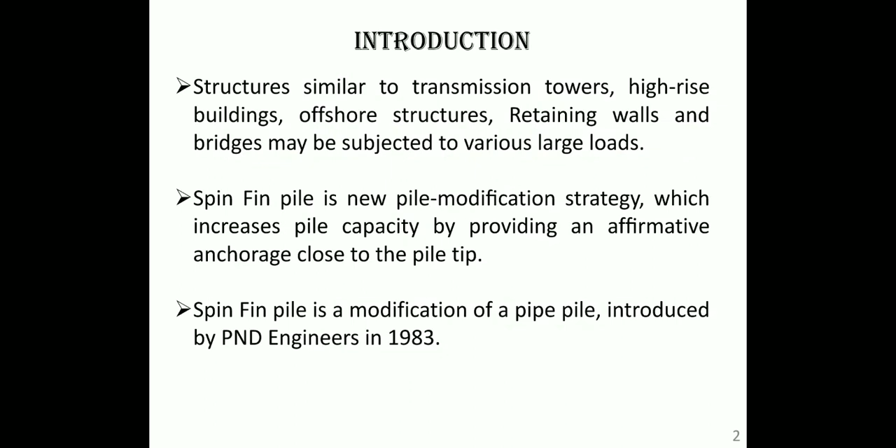Introduction. Many transmission towers, high rise buildings, offshore structures, retaining walls, and bridges may be subjected to various large loads. Spin fin pile is a new modification strategy which increases the pile capacity by providing an affirmative anchorage close to the pile tip. Spin fin pile is a modification of pipe pile introduced by the PND Engineers in 1983.

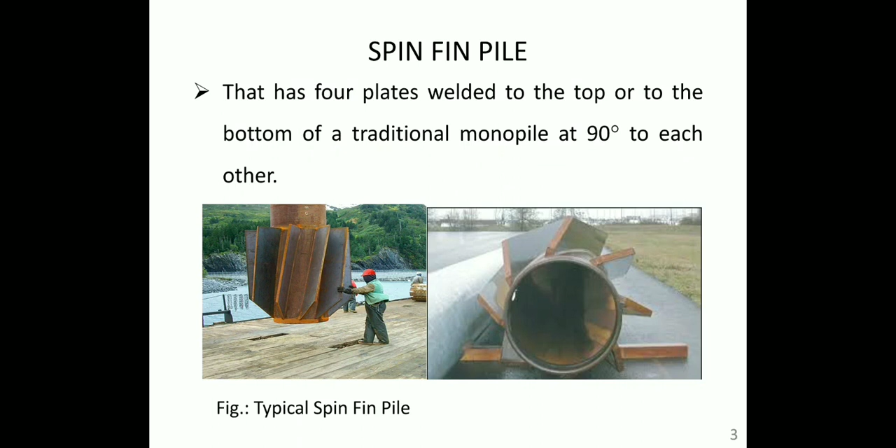Here we can see the typical view of spin fin pile. Spin fin pile has 4 plates welded to the top or to the bottom of the traditional monopile at 90 degrees to each other.

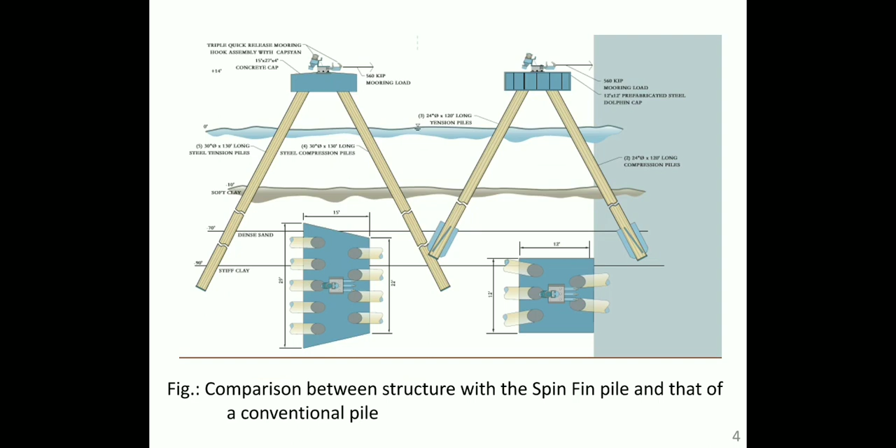Here is the comparison between the structure with the spin fin pile and without spin fin pile. Here we can observe that the number of piles is reduced by provision of the spin fin pile.

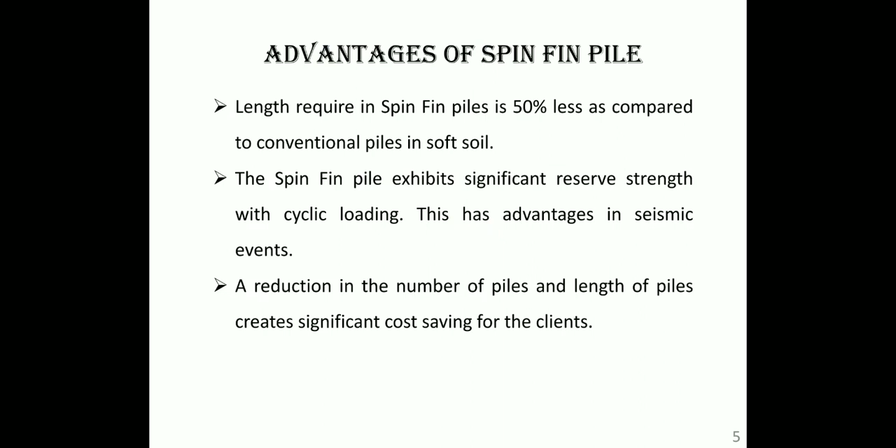Advantages: Length required in a spin fin pile is 50% less. The spin fin pile exhibits a significant reserve strength with cyclic loading. The reduction in the number of piles and the length of piles creates a significant cost saving alternative.

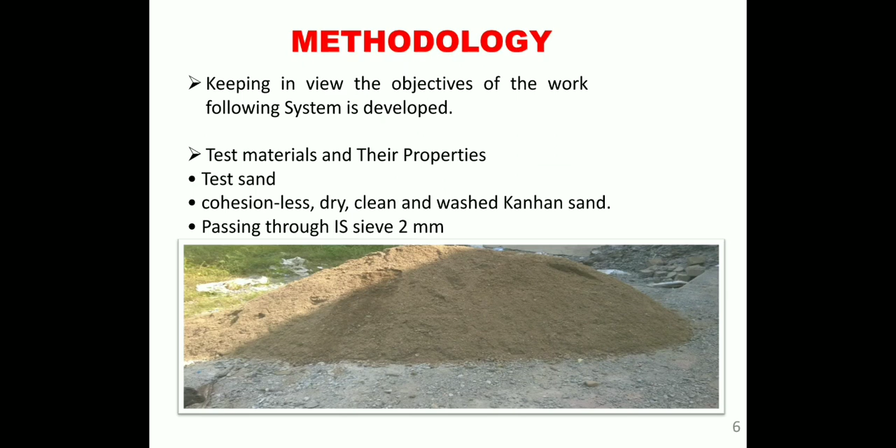Methodology. Keeping in view the objective of the work, the following system is developed. The image shows the sand used in the work, having a cohesionless, dry, clean, washed Kanhan sand passing through IS sieve 2 mm. These are the properties of the sand used for the experimental investigation.

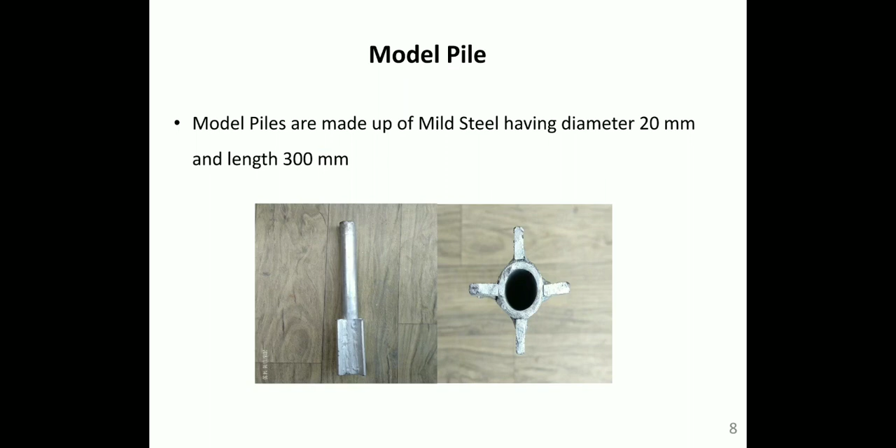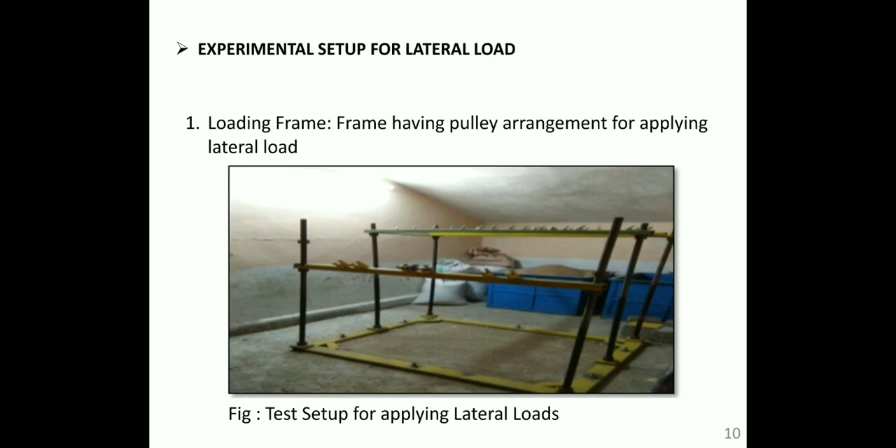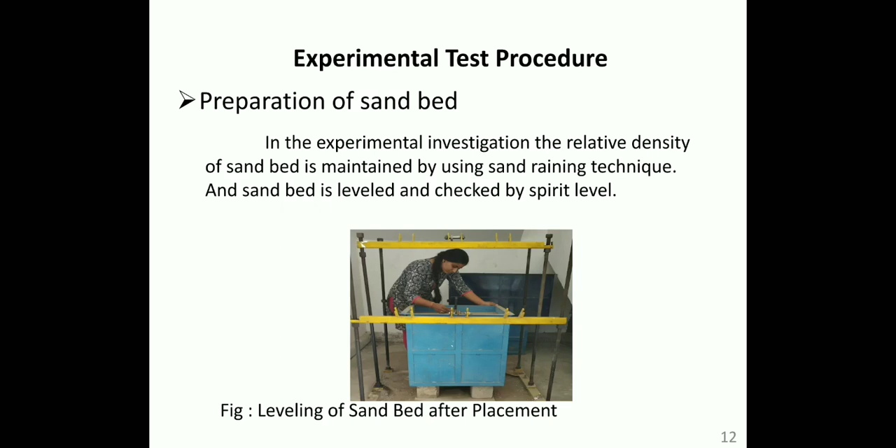In the experimental investigation, the relative density of the sandbed is maintained using the sand raining technique, and the sandbed is leveled and checked by the spirit level.

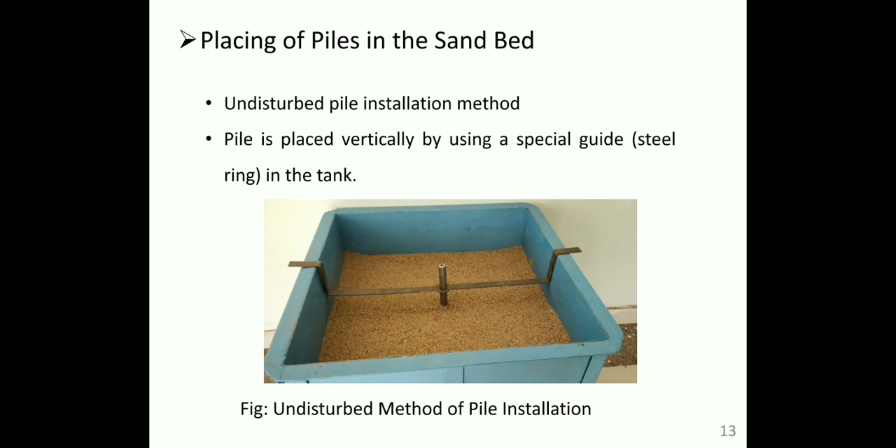Then the placing of the piles in a sandbed. Undisturbed pile installation method is used by using a special guide ring, that is the steel ring.

The model lateral pile load test is conducted as per IS 2911 Part 4 1985 to evaluate the ultimate lateral load capacity. The next step is placement of the foundation, then application of load in increments which is kept constant for half hour, and the last one is measurement of the lateral displacement using dial gauges.

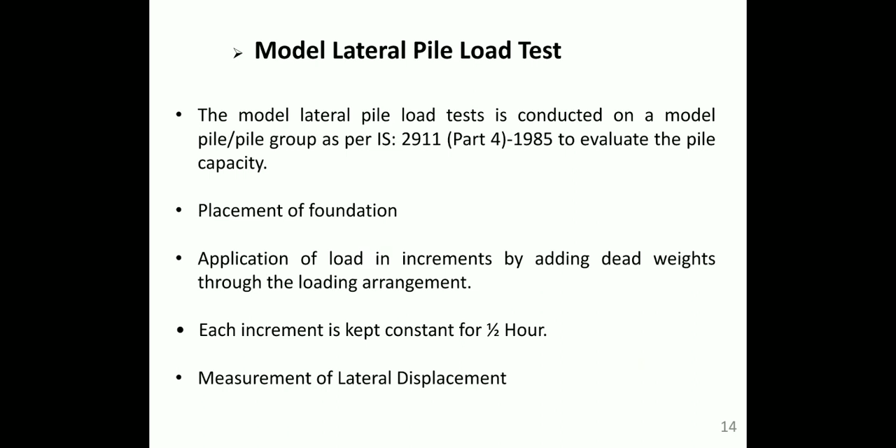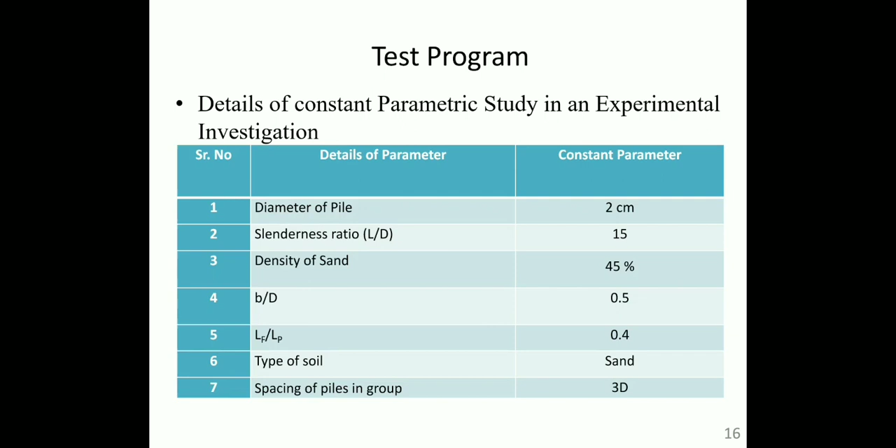Then the test program. These are the constant parameters used in the experimental investigation, and these are the varying parameters, in which type of loading is lateral loading, position of the fin is at the top, and the number of piles is single and group of 3.

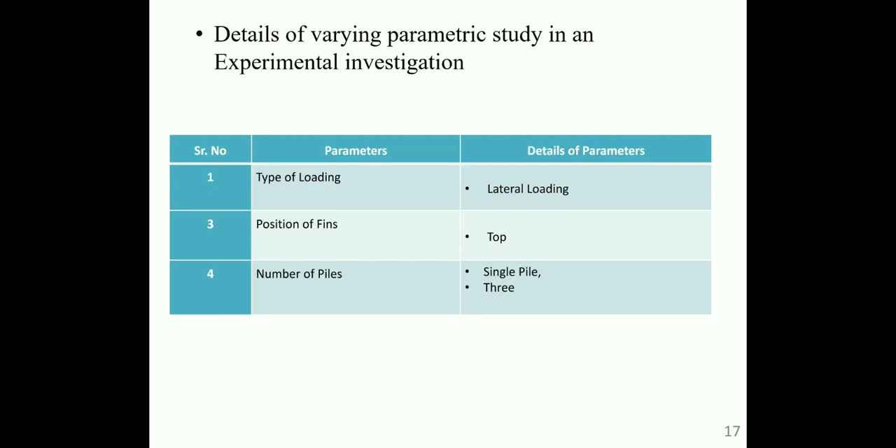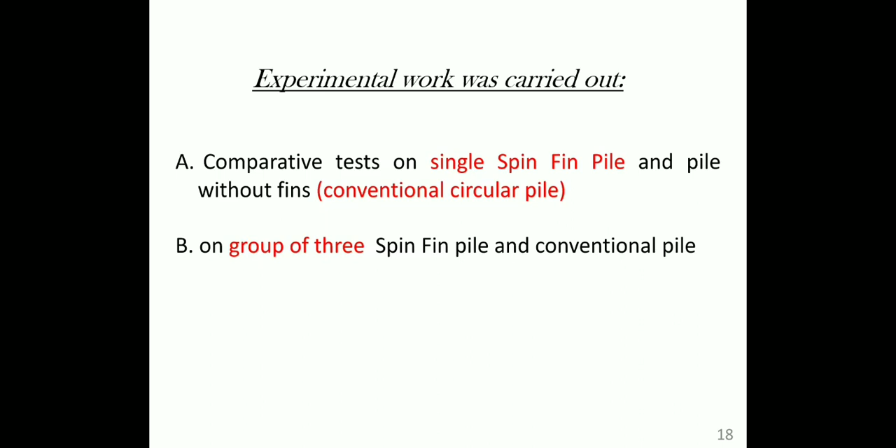The experimental work was carried out on a single spin fin pile and conventional circular single pile, and next is group of 3 spin fin and conventional pile.

The ultimate load capacity of the pile is determined as per IS 2911 Part 4 1985. The criteria used in the work is the load corresponding to the penetration equal to 10% of the diameter of the pile base.

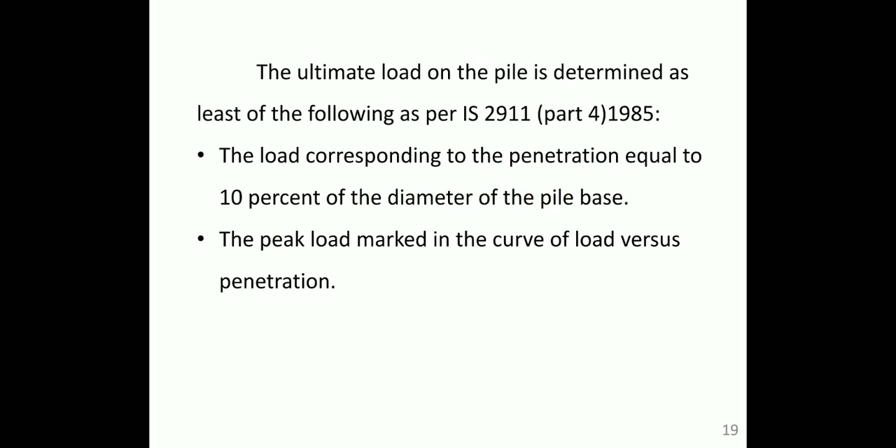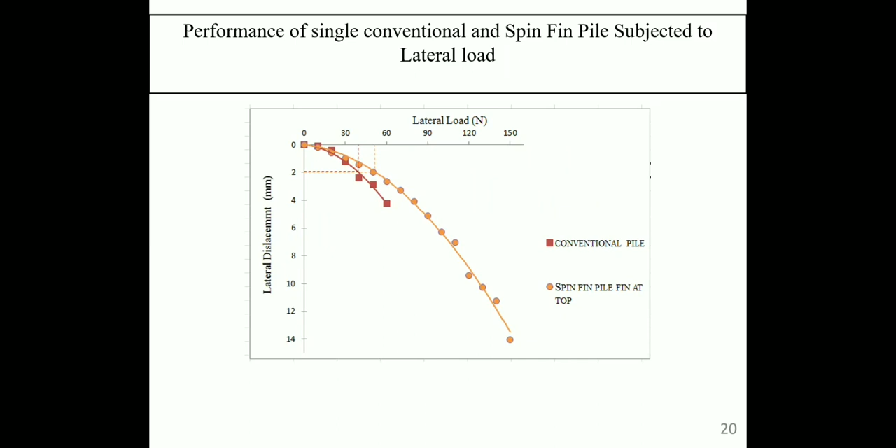These are the results. Ultimate lateral load capacity for conventional pile is 40 Newton, for spin fin pile it is 50 Newton.

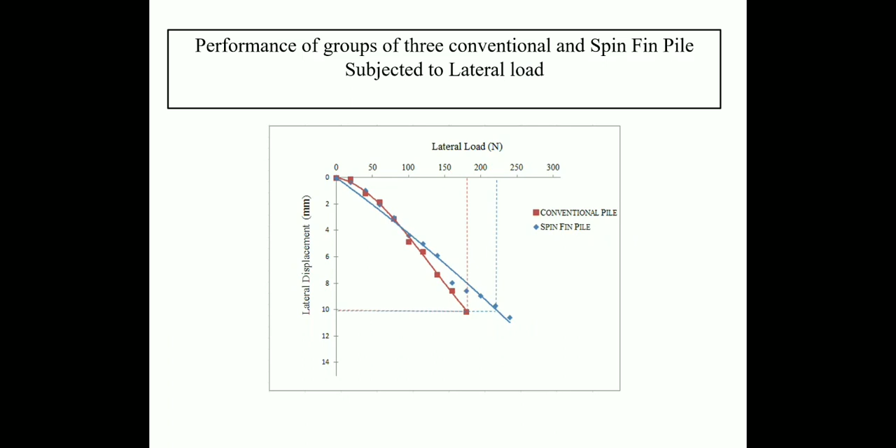This is the variation again between the lateral load and lateral displacement for the performance of group of 3 conventional and spin fin pile.

These are the results derived from the pile load test: 175 Newton for the conventional group of 3 piles, and 225, slightly greater than that of the conventional pile, for the spin fin pile.

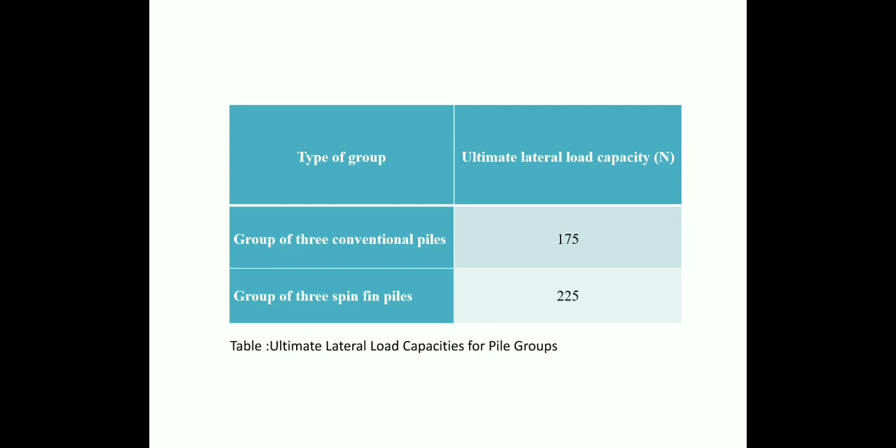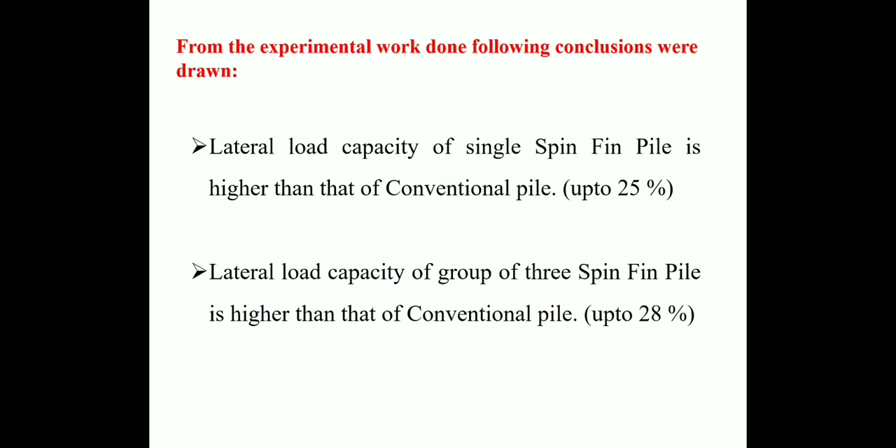These are the conclusions drawn from the work. First, the lateral load capacity of single spin fin pile is higher than that of the conventional pile, up to 25%. Second, the lateral load capacity of group of 3 spin fin pile is slightly greater than that of the conventional pile, up to 28%.